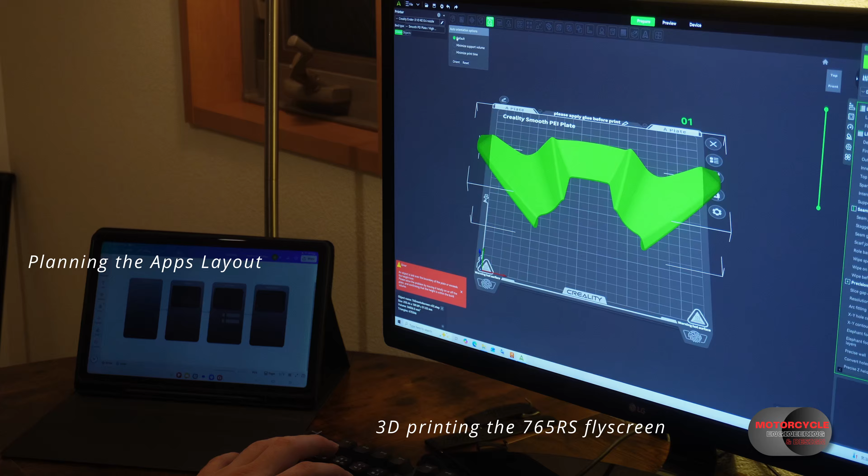Now, I'm a creative person and an engineer, and I like to have various different projects in parallel with everything else. This gives me something else to focus on. I get some satisfaction, some gratification, but never instant. It usually comes from either the process or the result, or of course both.

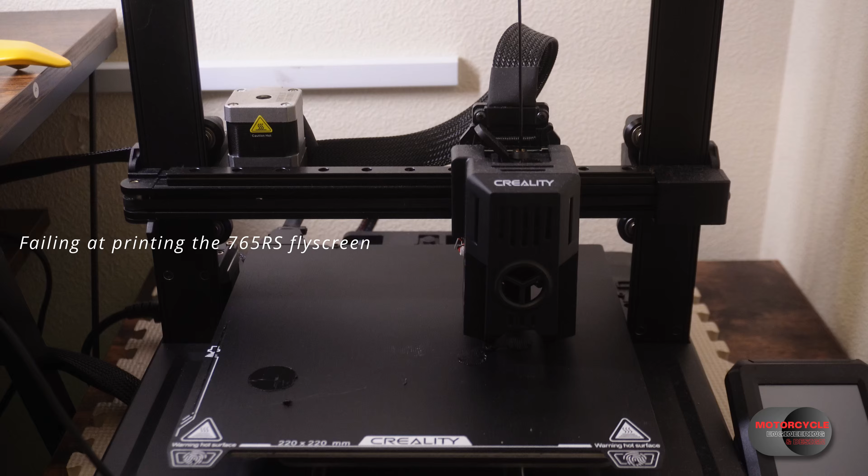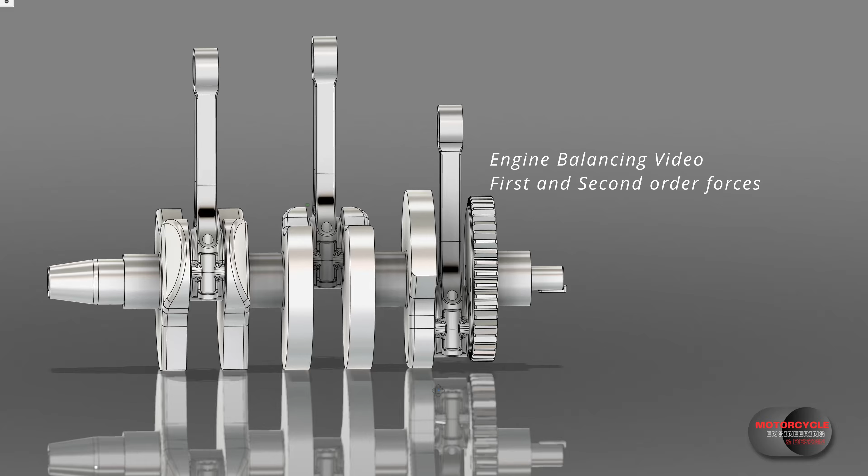But sometimes there can be hurdles that stop us from even getting to the point of the process. For example, I've got a number of projects going on right now, and I am my own boss, so which one do I want to prioritize? One may be more fun than the other, but it may take a lot longer to finish, and I may have been able to finish 2 or 3 projects in that time.

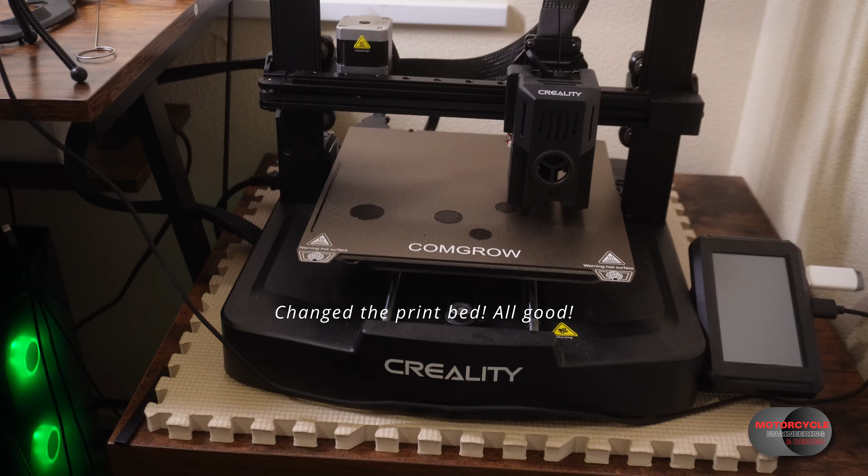We crave that kind of instant gratification, but at the same time, I want to do the really long, interesting one. And with the little time we have, we don't know where to start. So we procrastinate.

Procrastination is a project killer. There's probably so many people out there, many of you, that may have had some projects in mind that maybe you started and then you stopped, and then those projects disappeared. And now we'll never know whether anything would have come from them.

I'd like to encourage you to pick up those projects again, or start the ones that you're thinking of doing. And if you're procrastinating, I'd like to share some tips to help you get the ball rolling.

Now, the first thing I suggest is to write a list, preferably in bullet point form and in order, and you can do this whilst watching your favourite show. There's a couple of reasons why I suggest doing it like this. The first is that it's much easier to start with a small task whilst doing something that you enjoy. And by doing this, we start engaging with the project on a small level.

The second point is that starting a project kind of feels like work. So if we're thinking about work whilst watching our favorite show, our brain wants to make us get lazy and watch that show instead. We need to give ourselves a little kick to get moving. But no rush, no pressure, we're just writing a list.

Now for the second tip, I suggest writing another list. This second list should break down all those previous points into much smaller, simpler steps. That makes it a lot less daunting when we consider everything we need to do. And it gives us a clear place for where to start. In this list, we should also include all the things we need to prepare for each step.

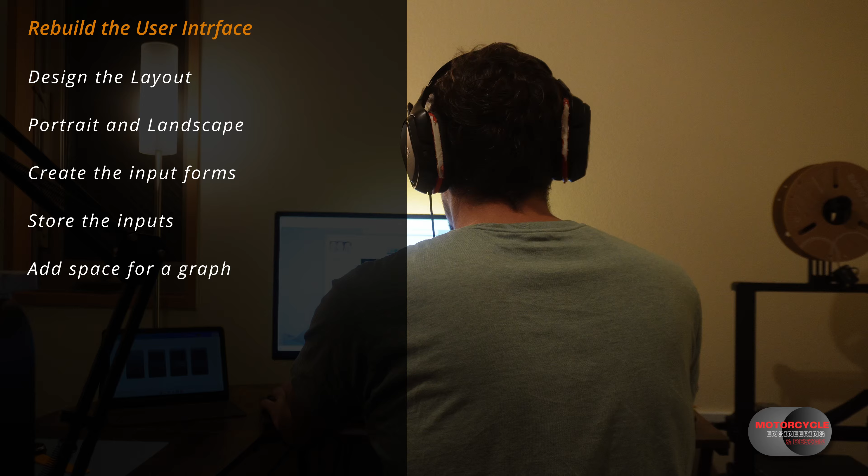And that brings me to tip 3, probably the most important, which is to start a small amount of preparation with no intent on continuing. We can easily convince ourselves that in order to start this project, I need to do a number of things, and we can get a bit overwhelmed with that. So just choose one of those things. Say, for right now, I'm just going to do that one thing. I'll leave the rest till another day.

And what you'll probably find is that you're happy to continue with the preparation. And as you do so, you start to feel that gratification, start to build up the satisfaction. And before you know it, the ball is rolling and you're picking up momentum.

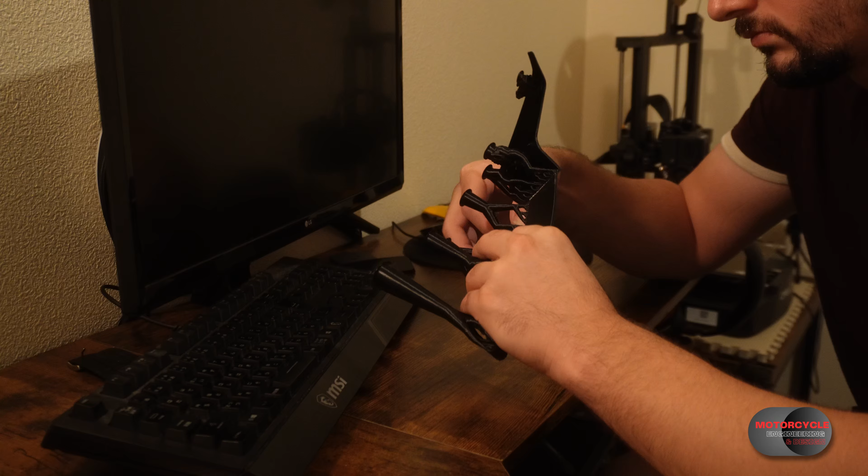Tip number 4 is to reward yourself with something that you enjoy, that you're not going to allow yourself to enjoy unless you engage in the project. Now for myself, I'm usually working from 9 p.m. onwards, so to help me stay awake, especially when I'm editing long videos, I'll usually have an energy drink or a coffee, along with some snacks, some chocolates or something. I also try to make sure that the biggest distractor, being my mobile phone, is not within arm's reach.

So I'd like to share some of the projects I've been working on which have yet to be released.

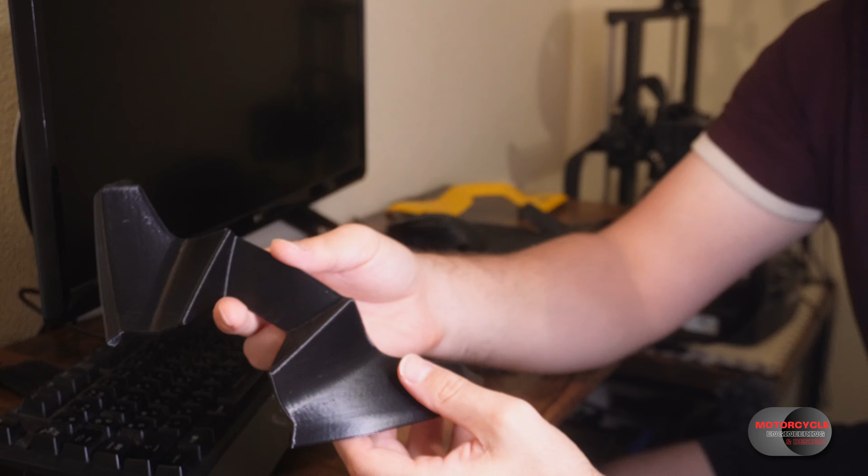The first is the windshield. I did upload a 1.5-hour video modeling this. If you're interested to see that bit in a more condensed version, please let me know in the comments below. As for the piece itself that I printed, it turns out the mount feature is at a different angle, so this isn't going to be able to be installed.

Checking the finish of it though before I reprint it, it's come out not so bad actually. It may just take a little bit of finishing, and the fact that it's so flexible will actually help to install it on the bike in case of any deviation from the real dimensions.

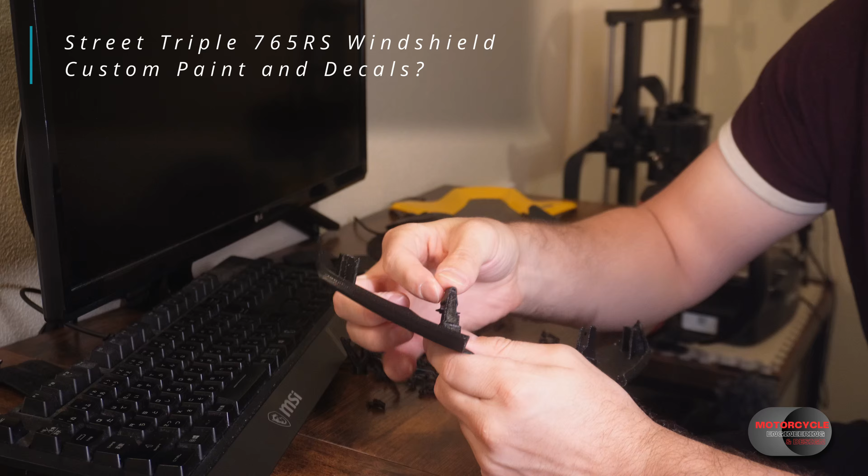The original piece has these towers where there's a plastic clip fitting which helps install it onto the bike. The towers I modelled on this part are a bit tight but it does work, so it will just need a little tweak to the angle. Maybe I'll thin the surface a little bit and then it should fit no problem. Then from there it's just finishing this part.

So I'd like to get your input on this. Do you think I should try to replicate the yellow? Go for a completely different colour to go with the yellow? Maybe a two-tone? And then what about stickers and decals? I was wondering whether to recreate the RS sticker or even try to design my own. Let me know what you think I should do.

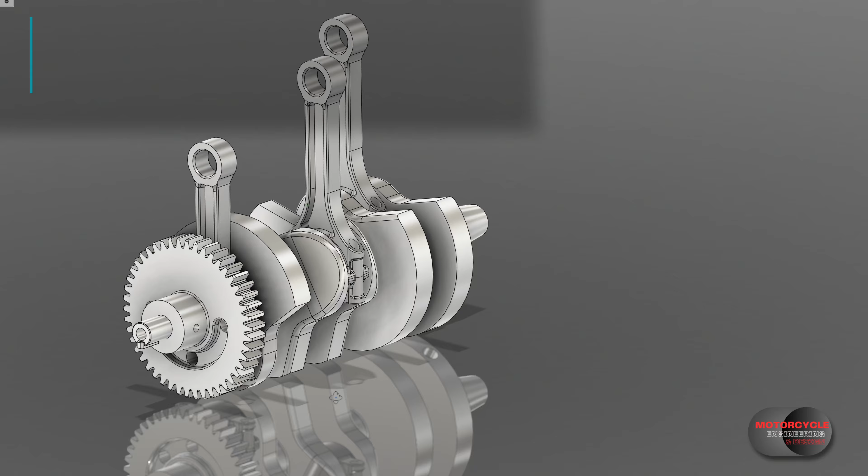Now the second ongoing project is to model the engine, or at least the crankshaft, conrods, pistons, replicate a cylinder and the cylinder head. The purpose of this is to explain engine balancing.

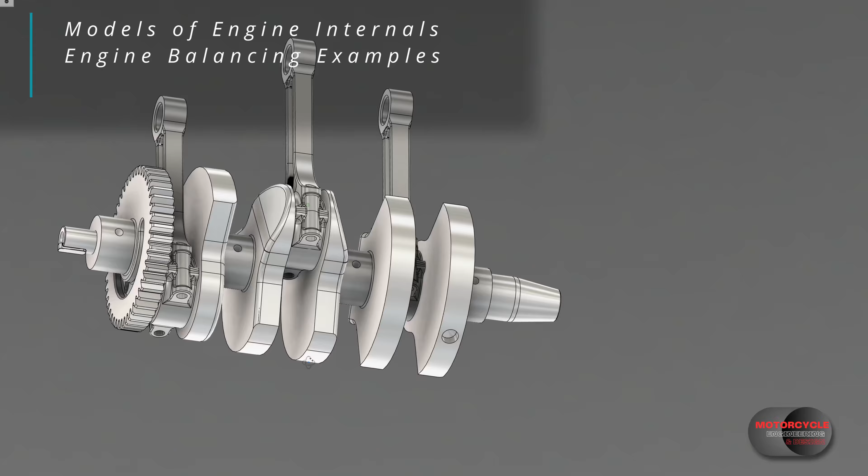The reason for that is I've seen many people talking about triples and just saying offhand that they are inherently imbalanced, and this is where the vibrations are coming from. I think that ignores the fact that almost every other engine is inherently imbalanced. So I'd like to go over some examples, some calculations. We're basically going to look at the balancing of an inline 4, a triple, a parallel twin, just so we can understand what is actually meant by balancing.

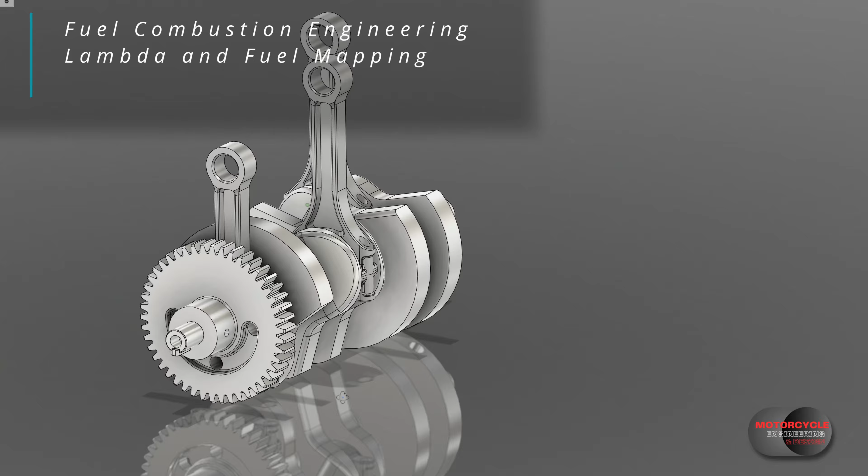The next project is probably going to be the next one I actually release, which is going to be on fuel combustion. We're going to look into some combustion engineering, what's happening when our fuel is being burnt, the emissions being emitted, and how our fuel mapping affects those emissions, the power and the economy of our engines. So we'll be going into the enthalpy of combustion, air-fuel ratio, lambda, and fuel mapping.

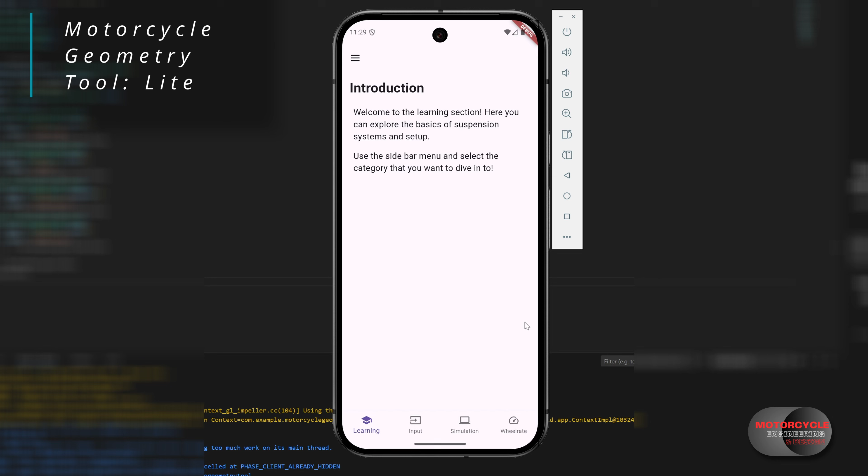Now the next project is something a bit more long term, and you'll have seen some early versions of this in an Excel worksheet or Google Sheets which I've shared. It's got a number of sections, including a learning section, so you can study up on motorcycle dynamics and then apply that to the input and the simulation in the app.

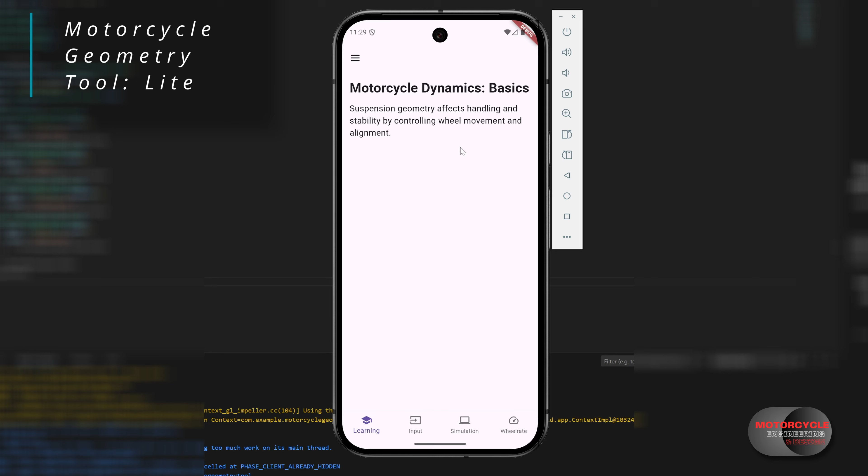Then we've got the input page. This is where we're going to put all the initial geometry measurements, and once that's been input, it's going to plot that in a graph at the top. At the moment it's just been replaced with some placeholder information. So you'll be able to use that to see what's happening with your geometry as you change it.

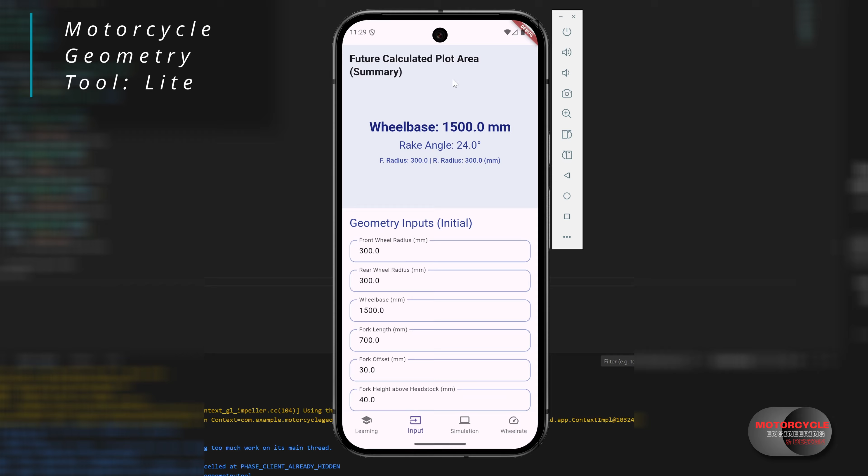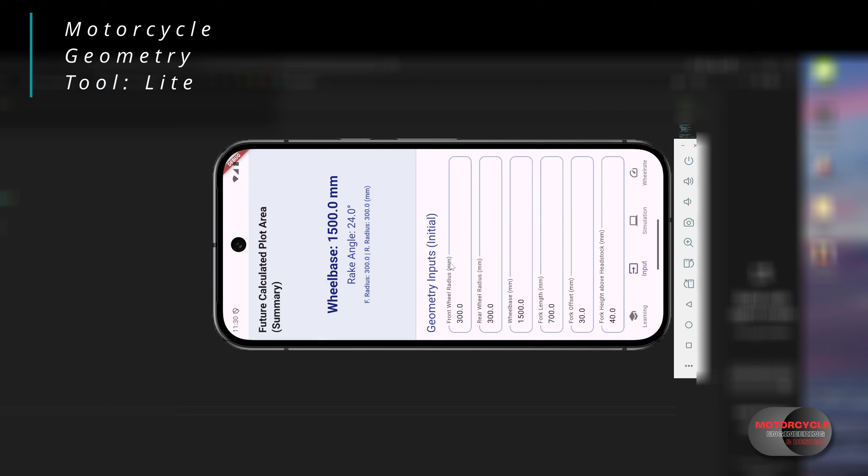But also if you go to the simulation page, we'll be able to adjust the fork travel or the shock travel, and this will recalculate all the previous values and display that on the screen for you. Then lastly, we have the wheel rate section. This one is going to show how the geometry of the rear suspension is affecting the wheel travel.